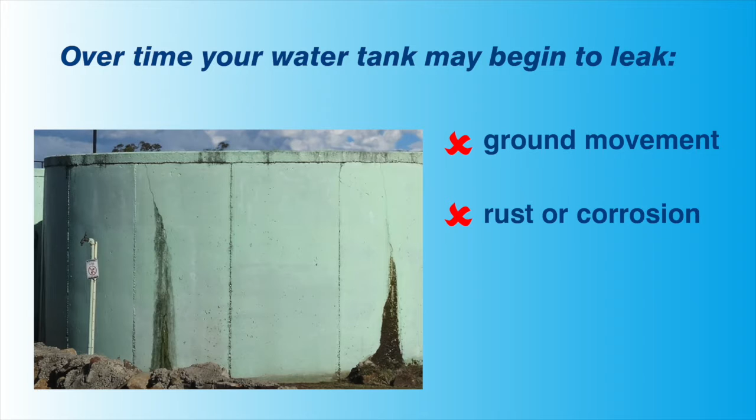There are a number of reasons you may wish to install a water tank liner. The most common reason is that there are some small leaks in the water tank. These leaks usually occur because there is ground movement causing small cracks, or there could be rust or corrosion in a steel or metal tank, or there has been some degradation or splitting of seams in a plastic tank.

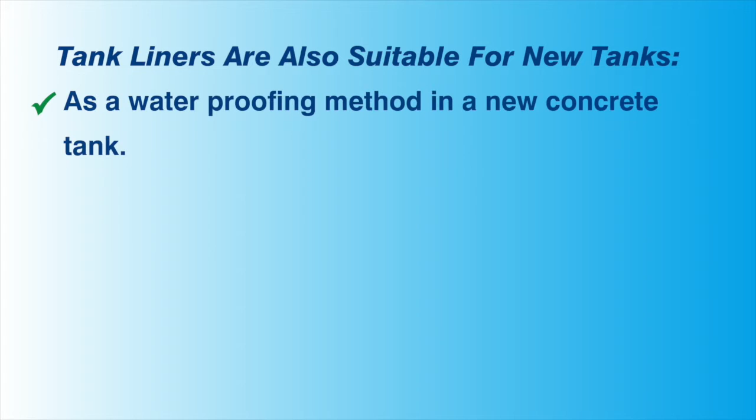However, you can also install a tank liner in a new water tank. This is an economical way to waterproof a new concrete water tank. It can also prevent future leaks where ground movement or contamination and corrosion may be a problem.

For most standard water tanks, the DIY handy person is capable of installing a tank liner. However, you will need to ensure the following: that your water tank is either an open-top tank or a closed-top tank with suitable safe access. Always be mindful that you'll be working in a confined space and that appropriate precautions need to be taken. If unsure, seek professional advice.

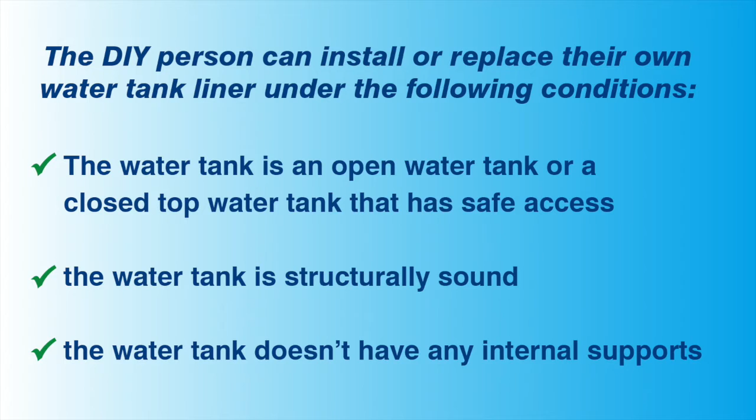Your water tank must be still structurally sound. There must also be no internal supports, as this requires specialised welding of the liner to ensure no leakage occurs. A new tank liner can be fitted to most common water tanks. These include corrugated, poly, flat steel and concrete water tanks.

After fitting your tank liner, the liner must be held in place. This normally occurs by partially filling the tank with 300 to 400 mm of water. Otherwise, you must secure the liner in place by some other method, or hold off installing the liner until it can be filled with some water.

There are 6 steps to installing a water tank liner. Step 1: Prepare all inlets and outlets. Remove sharp objects, then clean and dry the tank. Step 2: Install the underlay. Step 3: Secure the liner to the top of the tank. Step 4: Check and adjust the liner if needed. Step 5: Secure the liner around all inlet and outlet pipes. Step 6: One final check before you fill.

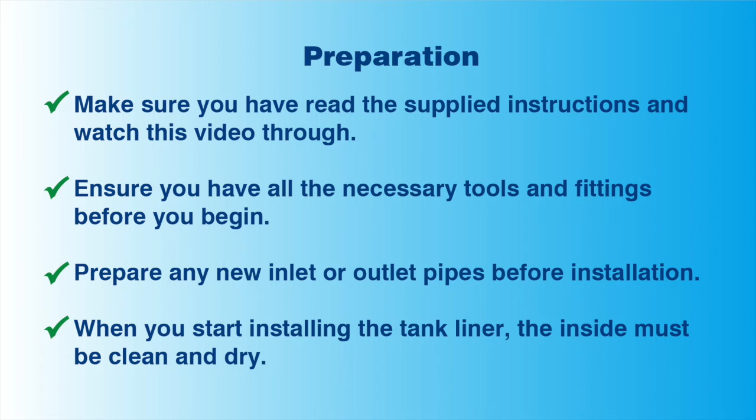Preparing to install your new liner. Make sure you have read the supplied instructions and that you have watched this video completely at least once. If you do not understand any steps, please ask us for clarification. Make sure you have all tools and fittings before you start, and that you have prepared all inlet and outlet pipes. Finally, the tank must be clean and dry before you start.

When preparing metal water tanks, make sure you remove all rust and scale from inside the tank. Any exposed metal surfaces must be coated with a rust-proofing agent. For all types of tank, there must be no sharp edges, protrusions, stones, roots, or anything else that has the potential to harm the liner.

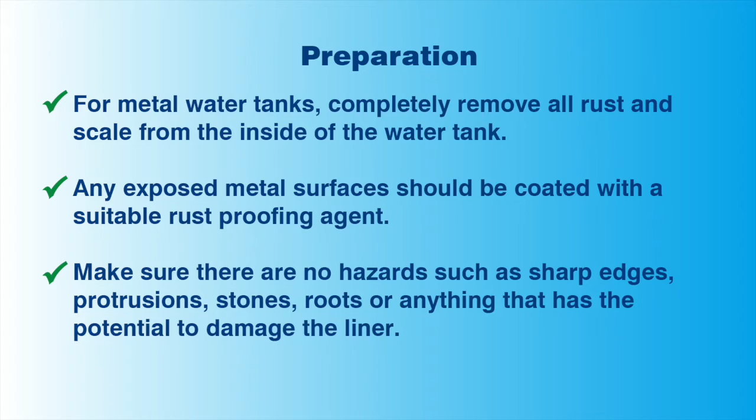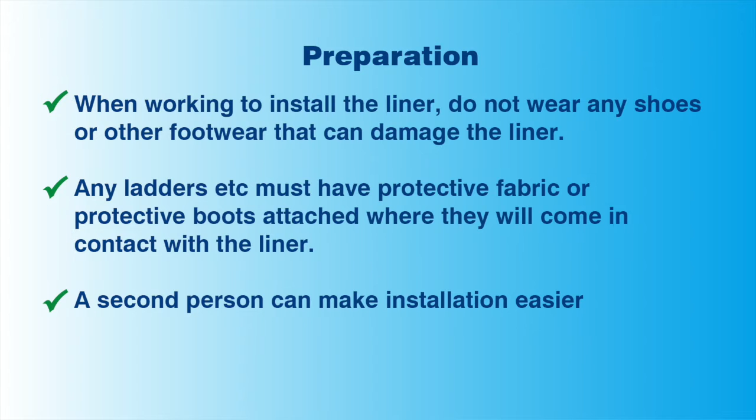Do not wear any shoes or footwear that can damage the liner. Any ladders or equipment that you are using must have protective boots attached, where it will come in contact with the liner. If possible, get a second person to help you, as this can make installation much easier.

Unless otherwise specified, every Fabric Solutions domestic water tank liner comes with a geotextile underlay. The underlay adds a layer of protection between the liner and the walls of the tank. Your underlay will be installed in 2 pieces, a wall piece and a base piece. The base piece is simply placed evenly on the floor. The wall piece will initially be temporarily hung and then permanently secured along with the tank liner.

Temporarily attaching the underlay. For open-top tanks, hang the underlay about 150 mm over the edge of the tank and temporarily secure it on the outside with some heavy-duty tape. For closed-top tanks, use the heavy-duty tape to hold the underlay along the inside top of the water tank.

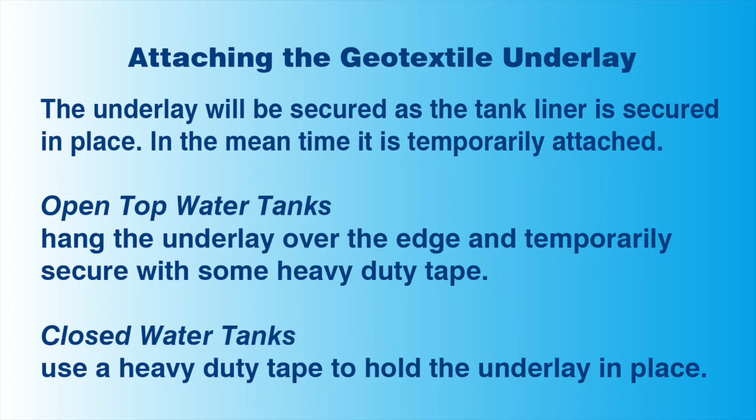Once the geotextile is in place, you can then begin installing your water tank liner. The installation method will differ for open and closed-top water tanks. Let's look at installation for open-top water tanks first.

With open-top tanks, make sure to also check that the rim and outside of the tank is free of any sharp objects. Once checked, you may place the liner inside the tank. Unfold the liner so that the perimeter wall base of the liner matches the wall base joint in the water tank. To help you position your tank liner, it will have a circle marked on it indicating the middle of the tank liner.

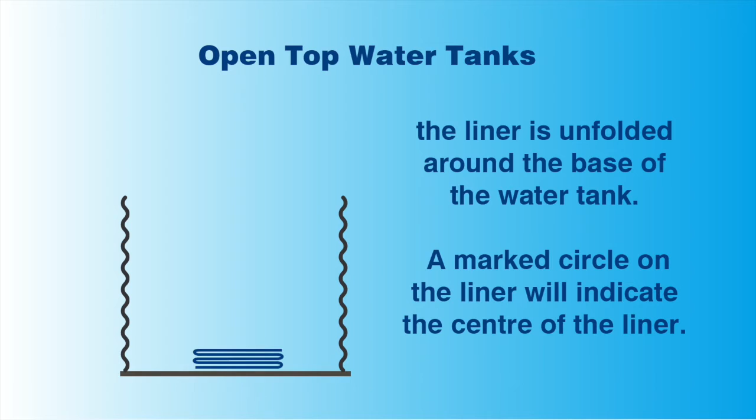Okay, let's see that visually. Remove the top if necessary. Carefully insert and then unfold the liner around the base of the water tank. Use the center mark of the liner to help with positioning. Then you can lift up the liner wall and fold it along with the underlay over the edge of the tank. Make sure the liner hangs over the side by at least 150 mm.

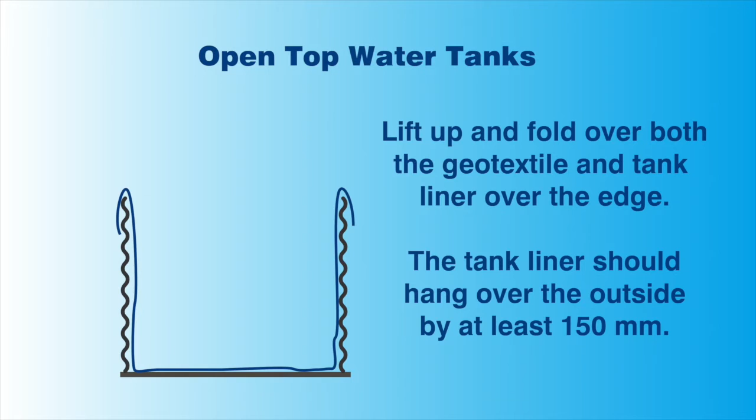Securing the liner. Before the liner can be secured, make sure any wrinkles are smoothed out as much as possible. There should be some slack at the bottom of the liner, as this will make fitting the inlet and outlet pipes easier. The liner is simply tied around the outside with fencing wire. We recommend that you run the wire through a garden hose or a similar type of tubing.

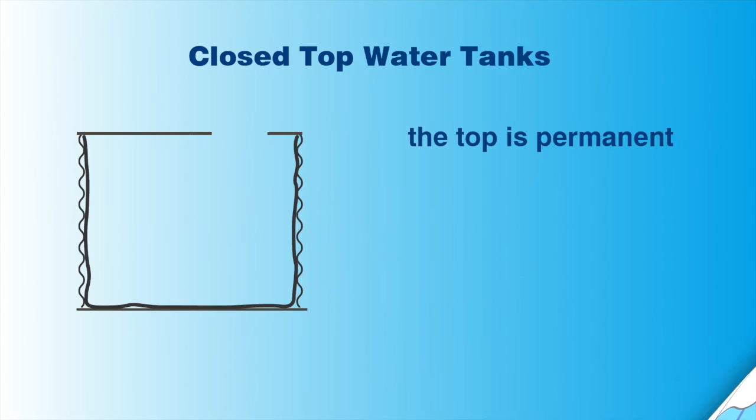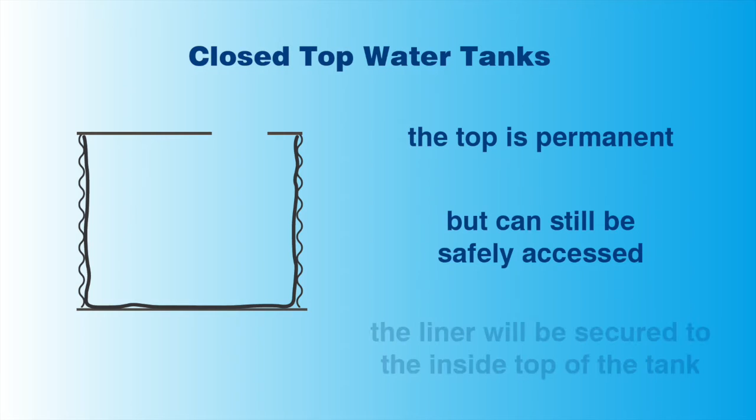Let's now look at installation for closed-top water tanks. Before you can begin, make sure you have safe access and that the water tank is well ventilated. The liner will be secured to the very top of the inside of the water tank.

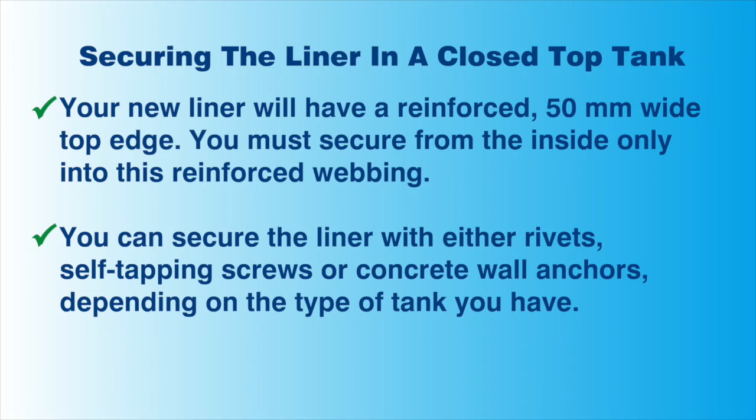Your liner will have a 50 mm webbed edge. You must secure into this webbed edge from inside of the water tank. You can secure the liner with rivets, self-tapping screws or concrete wall anchors, depending on the type of wall the water tank has. You must place the liner as high up as possible.

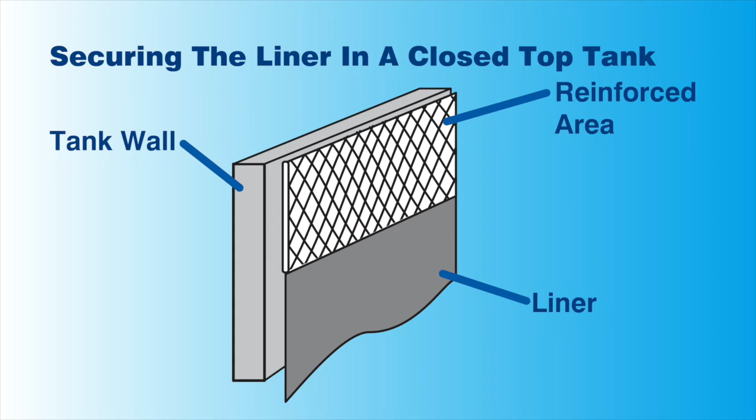The reinforced area will run along the top 50 mm of the liner. You must only secure the liner into the middle of this webbing with a suitable anchor for your type of water tank. The top of the liner must also be above all inlet and outlet pipes.

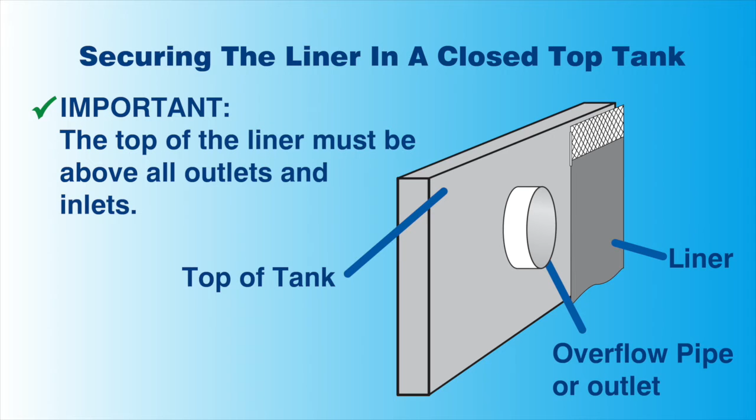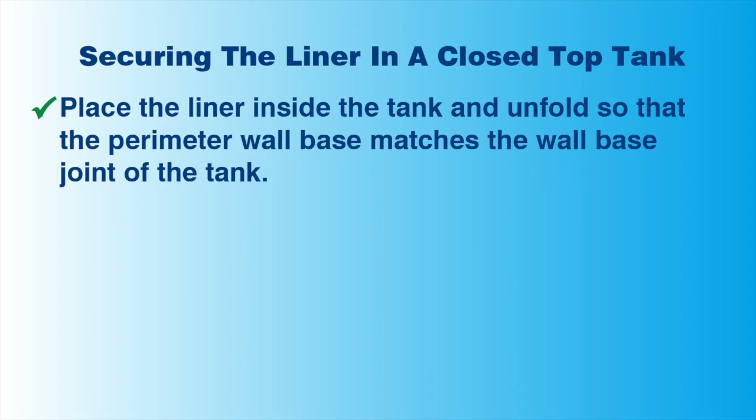Start by placing the liner inside the tank and unfolding the liner so that the base of the liner matches and fits in with the wall base and joint of the water tank. A center mark on the liner will help you position the tank liner. Initially secure just 4 corners of the tank liner, making sure that the geotextile underlay is secured at the same time.

So consider a clock. You would secure the liner at the 3, 6, 9 and 12 o'clock positions. At no point should the liner be under any tension. The liner is supplied slightly oversized so it can conform to the shape of the water tank.

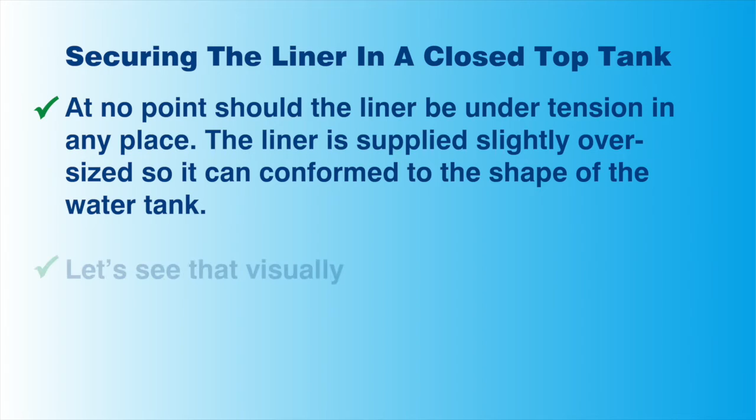Let's see that visually. Unfold your liner so that the base matches the base of the water tank. To help you position your tank liner, it will have a circle marked on it indicating the center position of the tank liner. Secure 4 equal corners of the liner, the 3, 6, 9 and 12 o'clock positions.

If the pleats or folds in the liner aren't vertical, the liner is twisted and will have to be adjusted before you can continue. You can either re-anchor the top or carefully adjust the bottom. The pleats or folds need to be vertical.

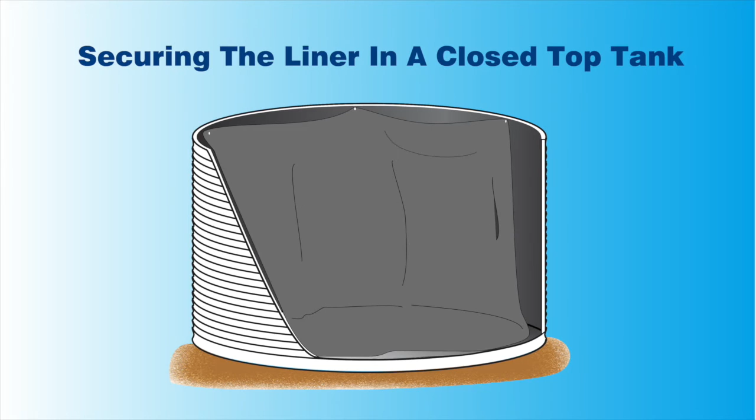Once the liner has been secured and the folds are vertical, you can keep securing the liner in the middle of each anchor point until they are approximately 200 to 250 mm apart. Ensure that the liner is evenly distributed and that there is no tension on the liner between any anchor points. Once finished, recheck that there is no twisting in the liner.

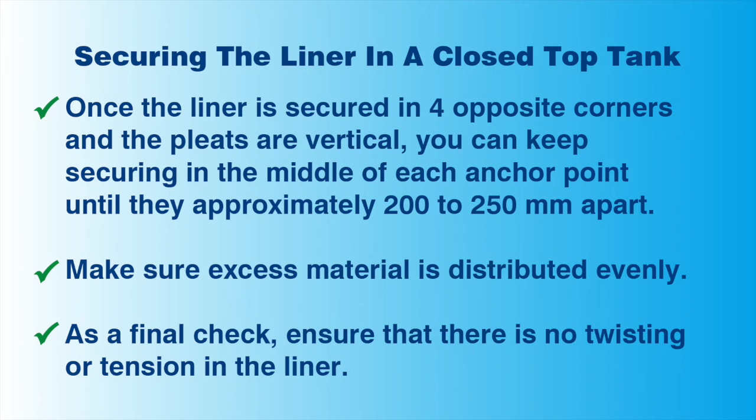Preparing the fittings for inlet, outlets and overflow pipes. Please note, as there is a large variation in the types of fittings that can be used, we do not provide new fittings. However, new fittings can be readily bought from most hardware or plumbing stores.

Determine what additional pipes and fittings you will need. Make sure to prepare all of these before installing the tank liner. Take care when installing the inlet and outlet pipes, as they must be sealed against the liner so that no leakage occurs. Some pipes, like the overflow pipe, will usually have to be replaced.

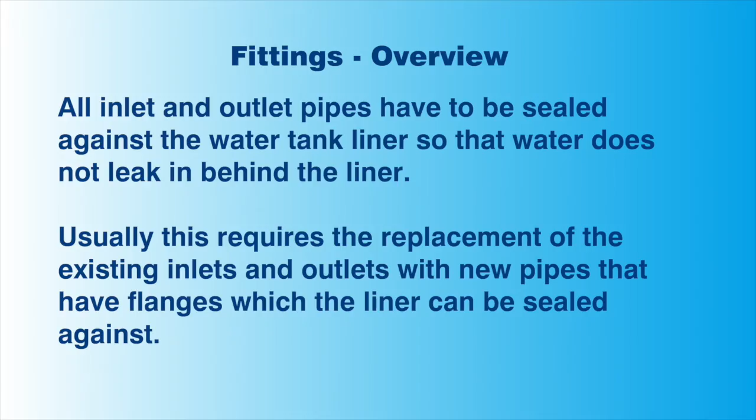Here we see an example of an overflow outlet that will have to be replaced. The pipe is located where the top of the liner will go and cannot be sealed properly. You will need to also make sure that the geotextile is cut away from around the fitting. The cleared area must be larger than the flange used in order to properly secure the liner around the pipe.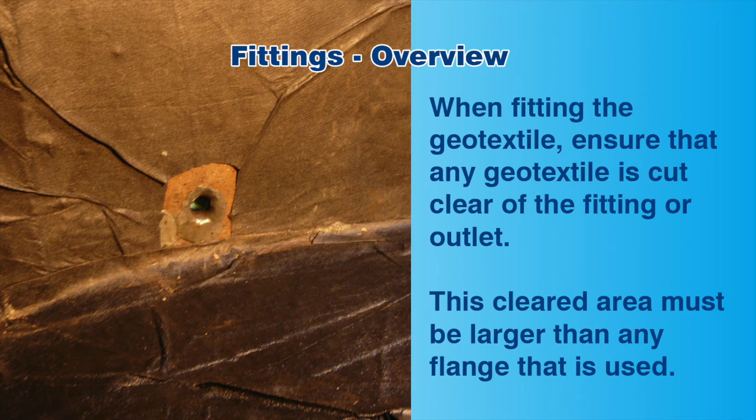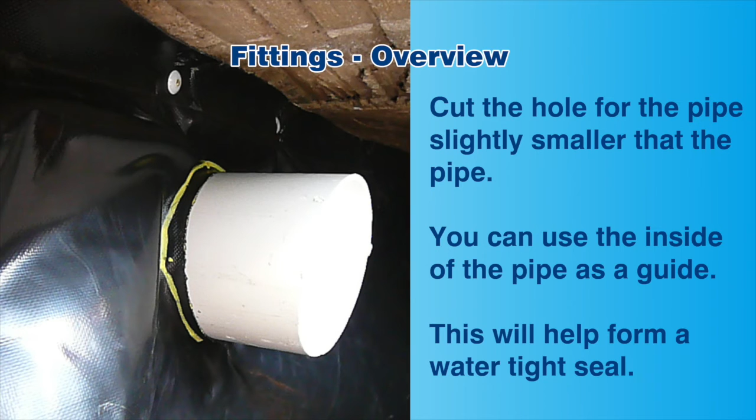Ensure any gaskets that are to be fitted onto the pipes are done so before the liner is installed. When cutting a hole in the liner, make sure it is slightly smaller than the pipe, as this will help forming a tight water seal. You can use the inside of the pipe as a guide.

Make sure to use potable grade silicone to seal around the edges of the liner. All sealants must be fully cured before filling with water.

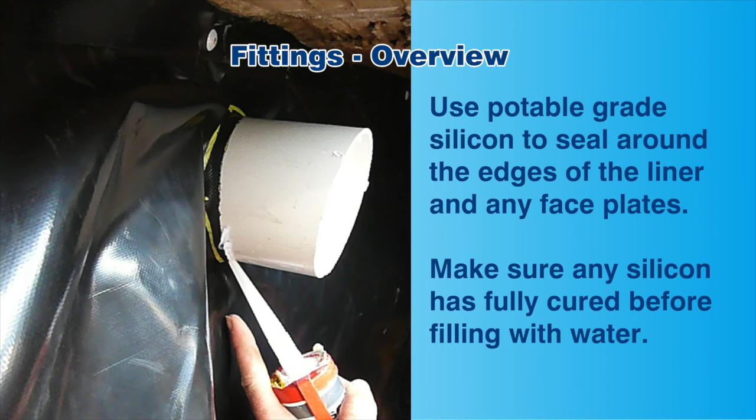Let's look at the outlet pipe in detail. The outlet pipe is typically 40mm in diameter and located around 150mm up from the bottom of the water tank. Typically the outlet pipe is sold as a set consisting of a threaded pipe, 2 gaskets and 2 locking nuts. On the inside of the water tank, the gasket will go underneath the liner.

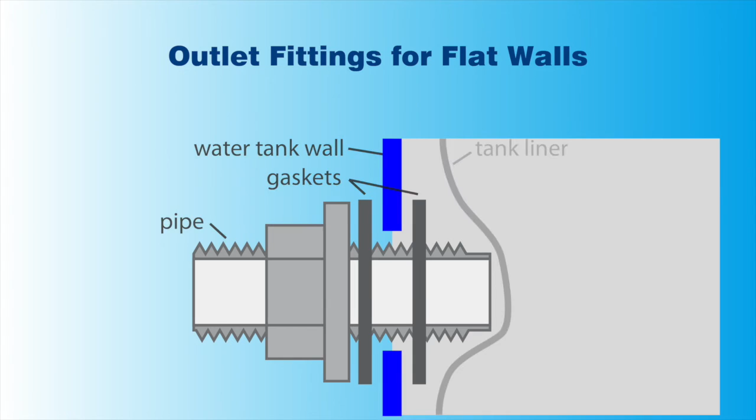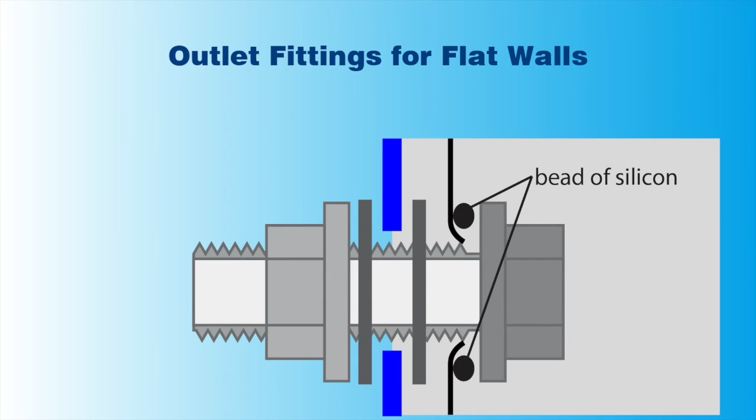Cut a hole in the liner that is slightly smaller than the pipe. Put silicone around the liner and locking nut. This will form a seal and stop the liner from leaking. All silicone used must be fully cured before filling.

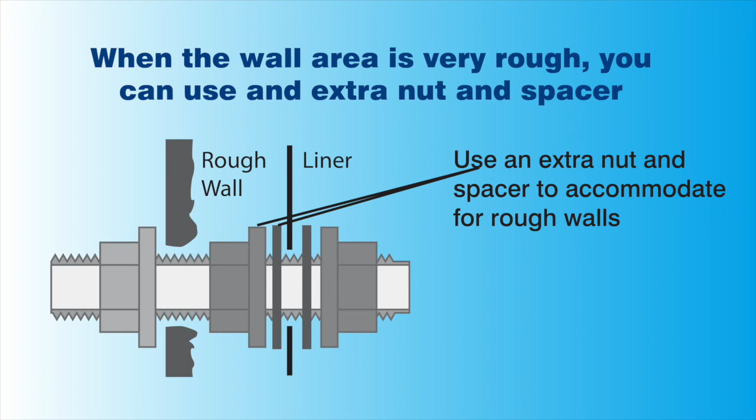For walls that are uneven and rough, you can use an extra locking nut and washer to form a flat area to seal the liner against. For corrugated water tanks, a specially curved washer has to be used. These are readily available from most hardware and plumbing stores.

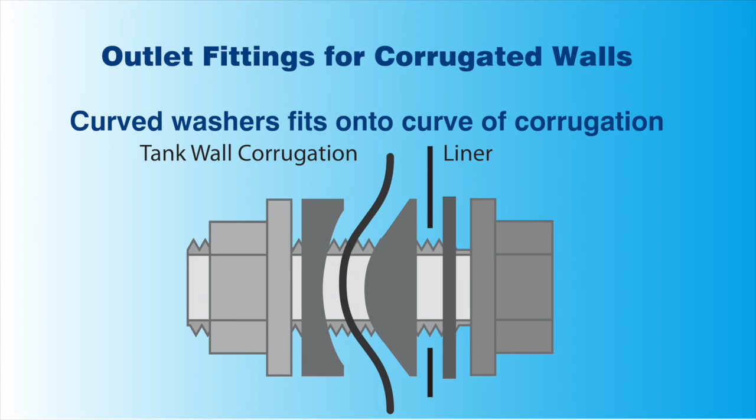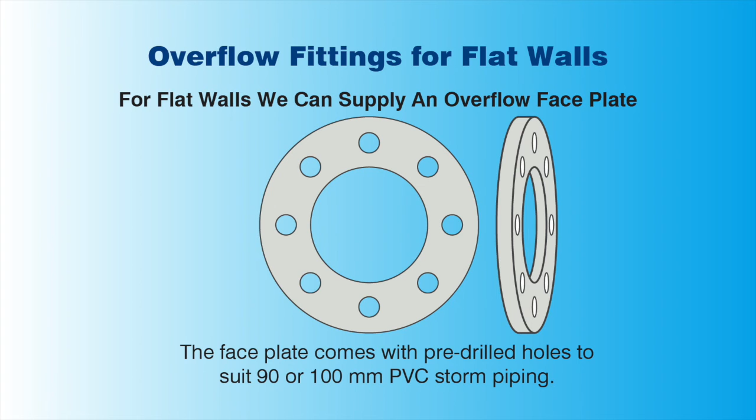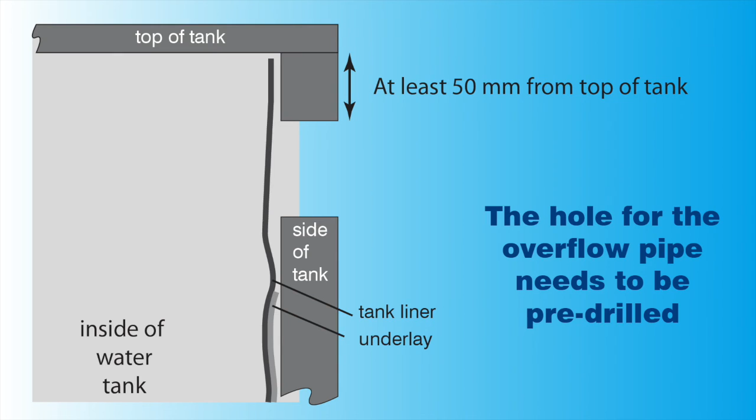Let's now look at the overflow pipe. For flat-walled water tanks, a face plate with pre-drilled holes can be supplied. This will suit either 90mm or 100mm PVC stormwater piping. You will need to block the old overflow pipe and drill a new hole that is at least 50mm from the top of the tank.

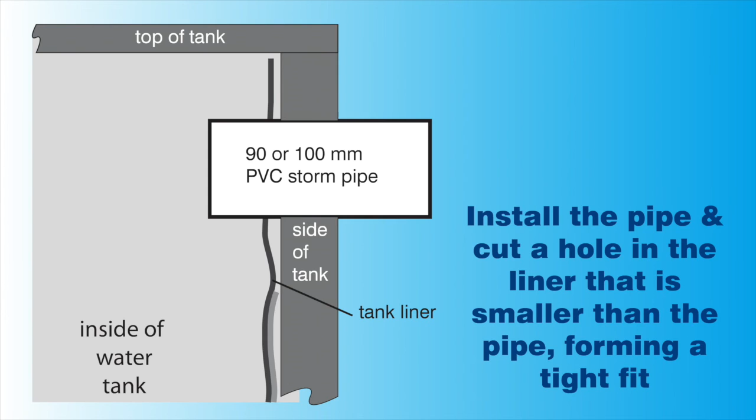This distance must be enough to accommodate the flange. Make sure to cut away the underlay underneath. The hole for the liner must be cut slightly smaller than the pipe to ensure a tight fit. Cutting carefully, you can use the inside of the pipe as a guide. Apply potable grade silicone to the liner and around the pipe at the width of the faceplate, and then fit the faceplate with suitable anchors.

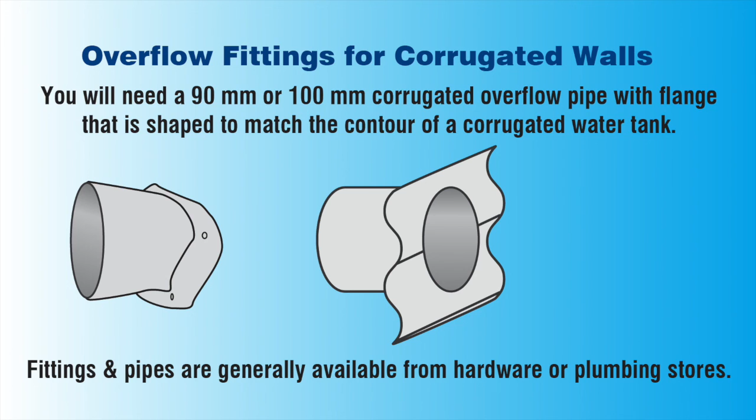For concrete water tanks, you may want to consider pre-drilling the anchor holes to avoid making a mess. Apply more silicone around the inner edge of the faceplate. For corrugated walls, you will need to obtain a faceplate that is suitable for your type of water tank. These are readily available from most hardware or plumbing shops.

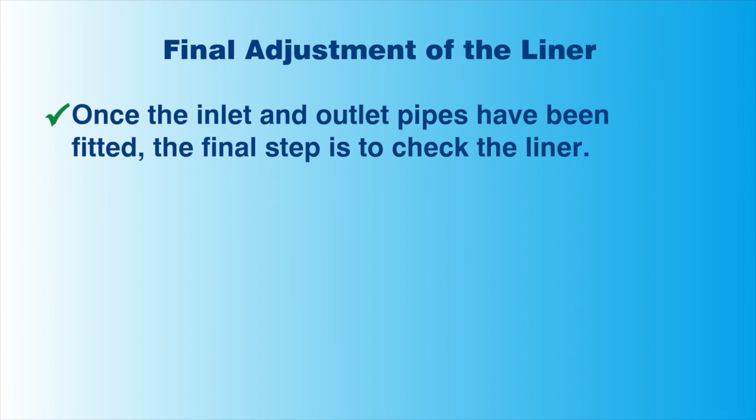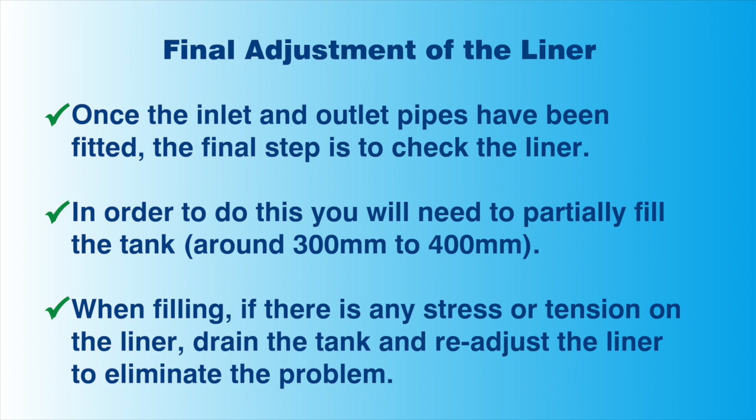Making final adjustments. Once all the pipes are secured, you will need to make one final check of the liner. To do this properly, fill the tank to around 300 to 400mm of water. When filling, if there is any stress or tension in the liner, you will need to drain out the water and readjust the liner to eliminate the problem.

Once you have finished installing the liner, you will need to put at least 300mm of water inside to cover the floor. This will hold the liner in place. If you cannot do this, you must secure the liner in another way to prevent movement of the liner within the tank. When you are happy that the liner is installed properly, let the water tank fill as normal.